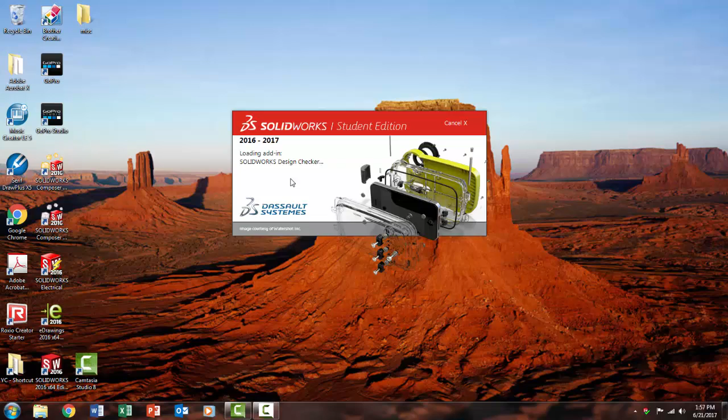So here it is, comes up, opens up, and you get basically nothing. So what's going on here? We're going to start something new. You can either do it here, go over to File, drop down New, or just go to this guy and click it, and it's going to say, hey, what do you want?

This is the screen that's going to come up all the time. These are the 3 different things you can do in SOLIDWORKS: you can create a part, an assembly, or a 2D drawing.

An item to note on this key that says Advanced, please make sure it says Advanced and not Novice. Just click it and it'll toggle back and forth. This opens up some of the simulation stuff that we'll be doing later.

Also notice the SOLIDWORKS tutorials are right here, you can click on those. And by the way, these are actually really good. There's a lot of bad tutorials out there in the world, but SOLIDWORKS prides themselves on some really nice ones.

Now, when you open a new document, the part will always come up first because we make more parts than anything else. Once you see that, just come down here, click OK, give it a sec, and it's going to give you basically a blank canvas eventually. And there it is, a beautiful blank drawing, nothing going on.

All sorts of fun stuff to play with here, and we'll eventually use everything up here, and this is going to get nice and full with all our stuff. There's also goodies up here, simulation and stuff, and we'll go through that as we progress through the course, but we're going to take baby steps right now.

Remember the SUMO acronym from the presentation: set your units, select your material, and turn on your origin. So, select your units. The easiest way is to come right down here, click that arrow, and then click between imperial, inch-pound-second, and metric, millimeter-gram-second. We're going to use either one of those.

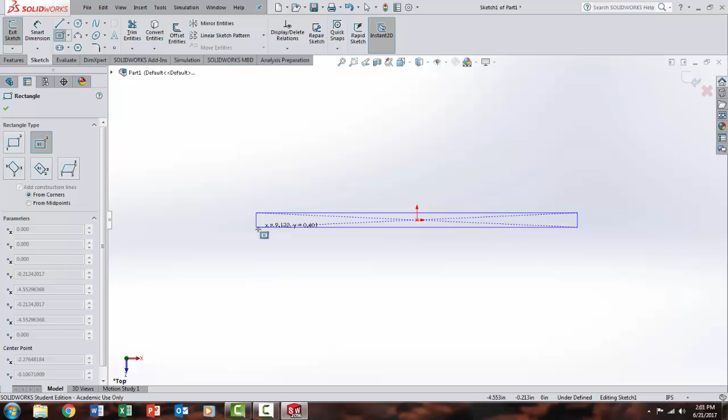So I want to draw a rectangle to start with. I tend to use center rectangles because I like to model about the origin. So I select that, click on the origin, drag it out, and go, hey, that looks pretty good. Then SOLIDWORKS says, hey, do you love your rectangle? Right here, and I say yes, I love my rectangle. I click on that, and there it is, happy, happy.

But hey, it's not happy, right? Because it's blue. That's kind of funny.

It's blue. What that means is blue lines, if you look down here - blue means it's underdefined, and this is a bad thing in SOLIDWORKS land. This is literally the very first thing I look at when I grade your work. If this says underdefined, bam, points just go off right off the bat.

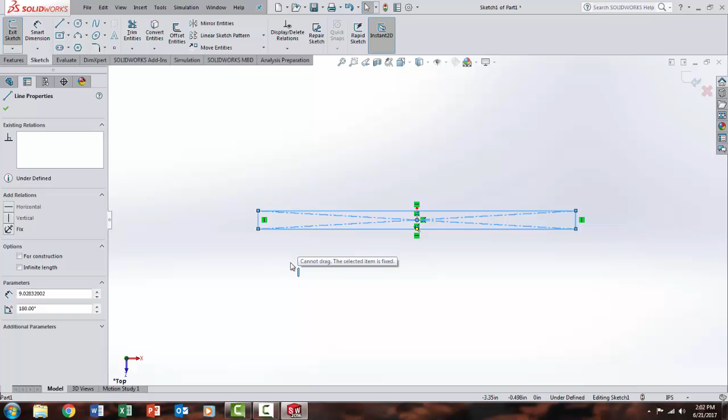Why is it underdefined? We have a nice rectangle, yes, but look what happens if I grab one of these guys - if I grab a corner and go, hey, all right, I haven't dimensioned it. So that's why it's underdefined.

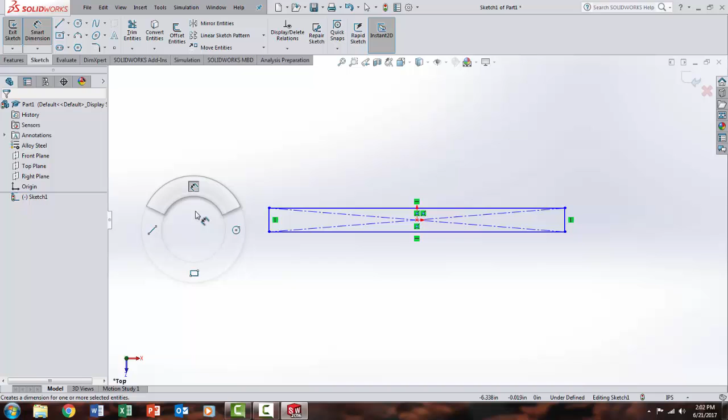So let's add some dimensions. How are we going to do this? There's one way - go up here and click Smart Dimension. I'm a huge fan of mouse gestures. You just hold your mouse down and click up, and bam, see how fast I was? That indicator right there is the Smart Dimension tool. Do it in slow motion: right click, move up, and there are the different things I can pick.

I can make a circle, and notice my cursor changed to a circle. I can do a straight line, goes to a straight line. I can do a rectangle, hey, it goes to a rectangle. Or if I go straight up, it takes me into Smart Dimension mode.

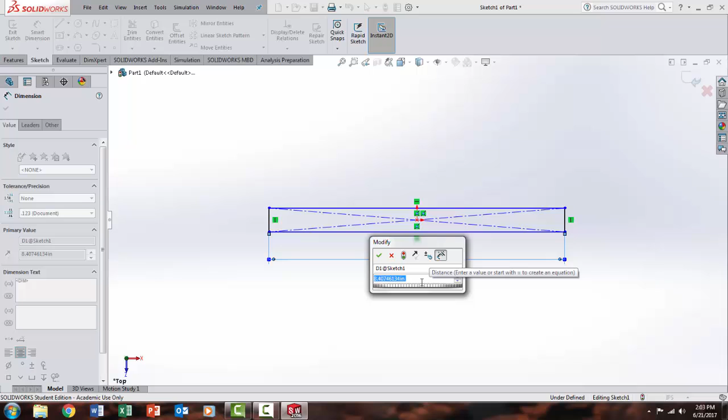Now, dimensions are really easy here. All I have to do is click on something. Let's dimension this - I click on it, I drop it down. Notice that as I move this back and forth, it positions where I want my number. So I generally want it centered. I like the looks of that. I click it again, and up comes this box, this is highlighted. Now I want this to be 3 inches. All I have to do is press 3 and enter, and bam, it's 3 inches, just like that.

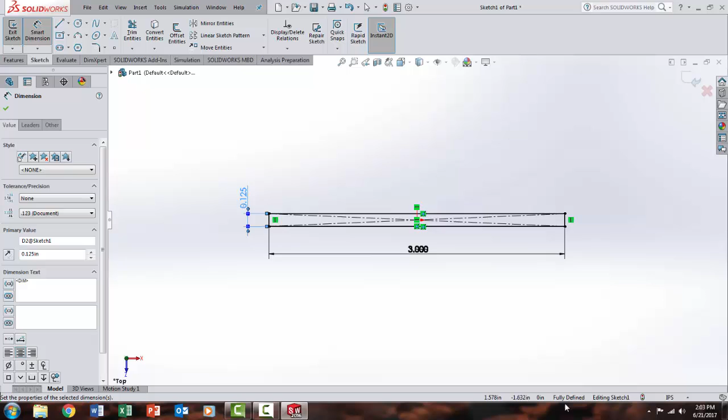I'm still underdefined. Why? Oh yeah, I haven't defined this one yet, right? So I'm going to come over here, select that line, pull it out, take my measurement up here, click it, and that's 0.125. I click this - hey, look what happened down here. It's fully defined now, and everything turned black. It's not blue anymore, it's not sad. This is a very happy drawing.

So do I love my dimensions? Yes, I do. So there's a 2D of the bar, right? If I hit Control and 7, it'll take me into isometric mode, and I can see what I've got there.

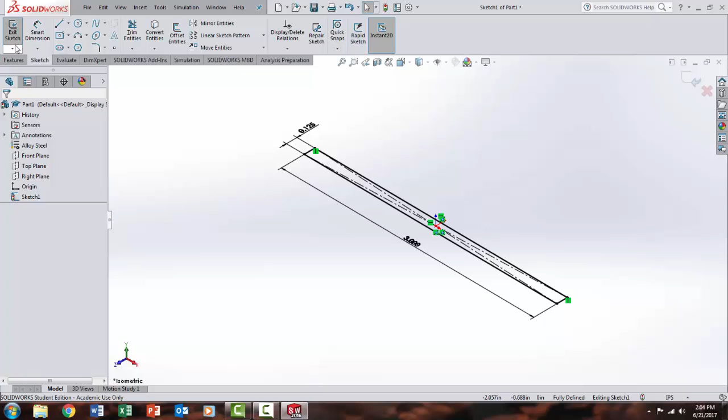So what I want to do now is extrude this part up. I go over to Features, click on Features, hit Extruded Boss Base, and notice down here this guy is highlighted. If I type in 0.125 and hit Return, I have my extrusion, and if I pick the little green arrow, it says ta-da! There it is, a beautiful rectangle. That's one way to make this thing.

Now, speaking of mouse thingies, there's all sorts of fun things you can do. The wheel will zoom in and out, but notice this, it zooms in and out relative to the cursor position. If I move my cursor up here, it zooms in and out there. You with me? That's kind of fun, right? So you can play with that.

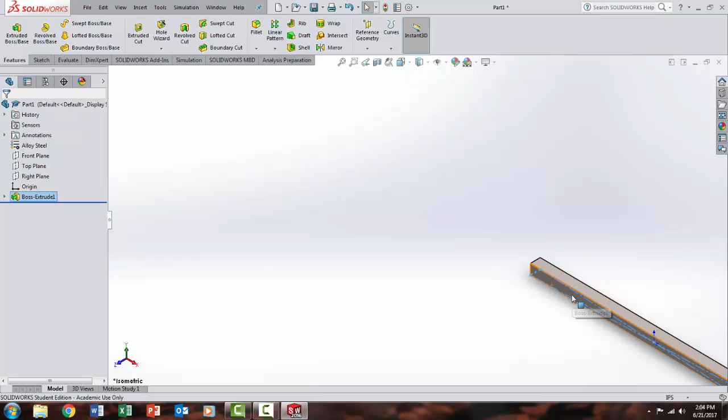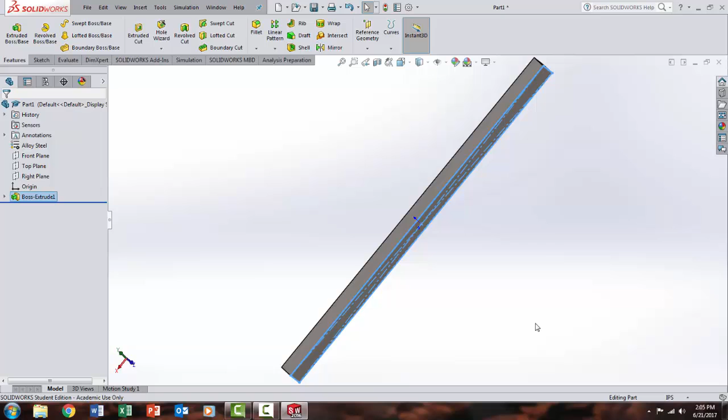If you hit the F key at any time, it will always fit your drawing to the screen. Now, I can hold my mouse down and go, wee! This is actually really useful when you're doing mates and assemblies and you want to move a part around. And if I get to that point and go, oh, I don't like that, Control 7, bam, back into ISO. So there's lots of really nifty things you can do.

Part of the problem with SolidWorks is there are so many shortcuts - mouse key clicks, mouse gestures, shortcut keys, combinations of both. And if you watch somebody that's been working in SolidWorks for a long time, they're going to use a lot of mouse gestures, and you're going to see these little flashes of a mousy screen thing pop up, and it's going to almost start to look like it's magic. But it really isn't - that's just someone that really knows what they're doing.

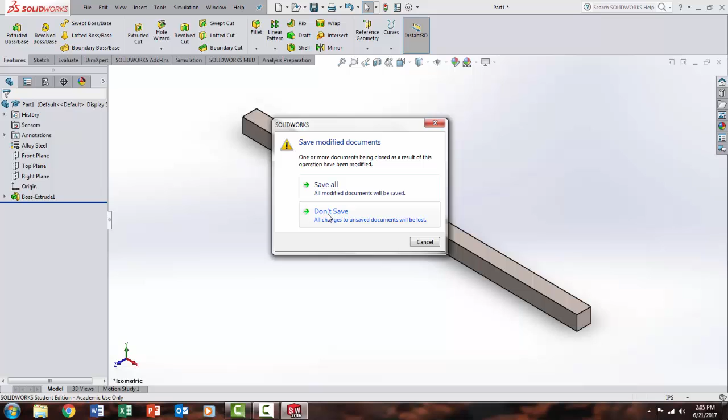So there's one way to do the rectangle. I'm going to pitch that because I want to show you a different way, and I'm going to start over again. Yes, I want a part. And again, I'm going to set my units, still IPS. Love it. I want to make it 3 decimal points, so I select that guy.

I'm going to set my material. Right click on that, edit material, alloy steel. Yes, apply, close. And what did it do? It immediately went there. What's the last thing to do? Turn on that origin. There it is.

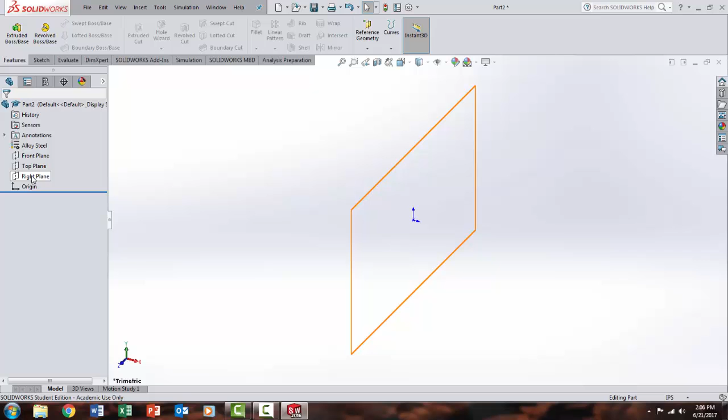So last time I started on the top plane. This time I'm going to do the right plane. I hover over right plane, right click it, say sketch. It says, let's go.

I'm going to pick a center rectangle again. It's already highlighted, and now I'm drawing the end of it. I'm going to intentionally make this kind of lopsided. The Escape key will always take you out of that mode. So there's a rectangle. I sort of love it, but I don't, because it's supposed to be a square, right? So how can I fix that?

Well, this box up here, display delete and add relations, it's a lot of fun. I can click add relation, and if I select one side, and I select the other side, and say I want those to be equal. Ta-da! There you go. Do I love that relation? Yes, I do. So now I have a perfect square.

Yet, notice down here, it's still underdefined. Why is it underdefined? That's why it's underdefined. This is one of the things you can do when working with SOLIDWORKS: if something says it's underdefined, grab it and try to move it. If you can move it, you'll figure out what's not locked in place. And what's not locked in place here? Well, it's the dimensions.

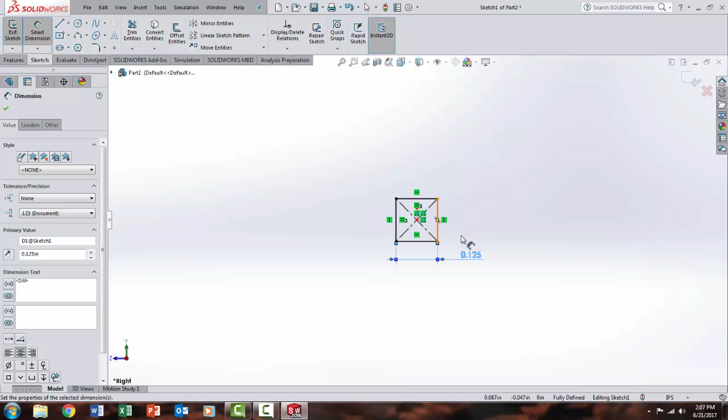So how do we do that again? Straight up with your mouse gesture, bam, I'm in smart dimension mode. I say I want this to be 0.125. I click yes, and I am instantly fully defined. Why? Because my relation says those two are equal, so it makes both sides equal. I have a fully defined sketch.

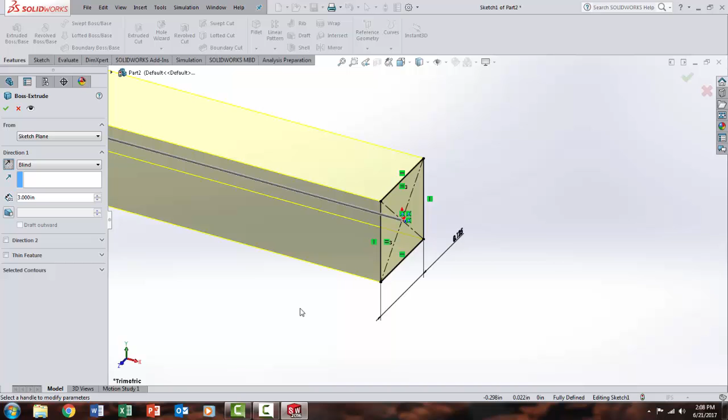I love my dimension. I'm going to add an extrusion. I'm going to put it in 3D for you, Control 7. There you go. This time I'm going to say I want that to be 3 inches long. Ooh, I'd like it to go the other way. Notice there's a direction arrow here, I can change that, extrudes it the other way. Can't really see what's going on, let's hit the old F key. There we go, back on screen. Do I love my boss extrude? Yes, I do. And there it is.

Hey, guess what, that's the same thing we just drew. It's different though, right? Because I drew it down here and extruded it that way. The first one, I drew this and extruded it that way.

I like to think of math and SOLIDWORKS a little bit the same way. When you look at a math equation, particularly in calculus and engineering, you find there are a zillion ways to solve any given problem. What's the best solution? Usually it's the most elegant one. In computer programming, we always say the shortest code that does the same thing is the best one, because it runs faster. So in SOLIDWORKS, the best drawings are the ones modeled the quickest, assuming the geometry is the same for all these guys.

One other thing I wanted to show you that's really important in this chapter: when you do a 2D drawing or an assembly, you have to use the Pack and Go feature. It's under File, right here. When you click on that, it's going to come up. Now notice I've only got one part here, I don't need it in this thing. I don't need to use Pack and Go for a part because it's a single document.

But when I have an assembly, I have multiple parts. What Pack and Go does is it takes all your part drawings and your assembly drawing and puts them in a little suitcase. Then you send that to somebody, and guess what, they've got all this stuff. They can unpack your suitcase and see everything.

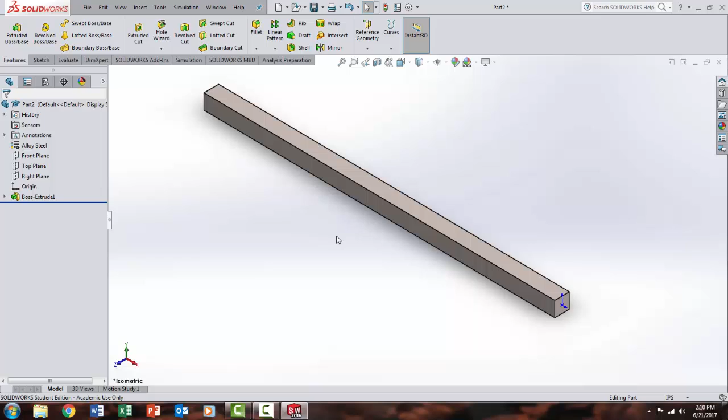The one thing to remember is down here, you want to click Save to Zip File, right? And then save it to your hard drive under the naming convention we use: EGR 180, your last name, the assignment name, etc. But you've got to use Pack and Go. If you send me an assembly or a 2D drawing that isn't done in Pack and Go, I will not be able to open it. If I can't open it, I can't grade it, and that's kind of a big boo-hoo for you.

All right, so that's about it for this demonstration. Again, feature manager guy over here, dynamic toolbar up here. We'll get to use all of these, look at all these fun things, man, look at all those tools. Yeah, first you look at this and you go, oh my goodness, that's overwhelming. You look at sketch tools and it's just as many, and each one of these lines has a whole bunch of fun stuff in it.

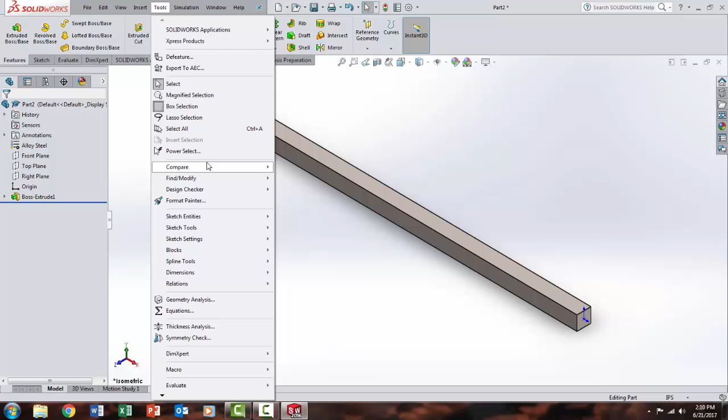But again, baby steps right now. You will learn to use most of these. They're incredibly powerful. I hope you really enjoy the SOLIDWORKS environment. And if you have any questions at all, please don't hesitate to email me, and I look forward to your progression as we move through the course. Thanks for watching.